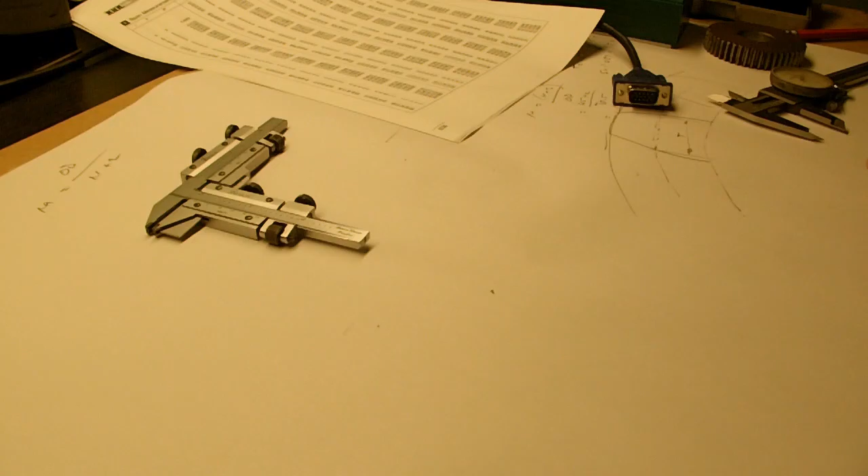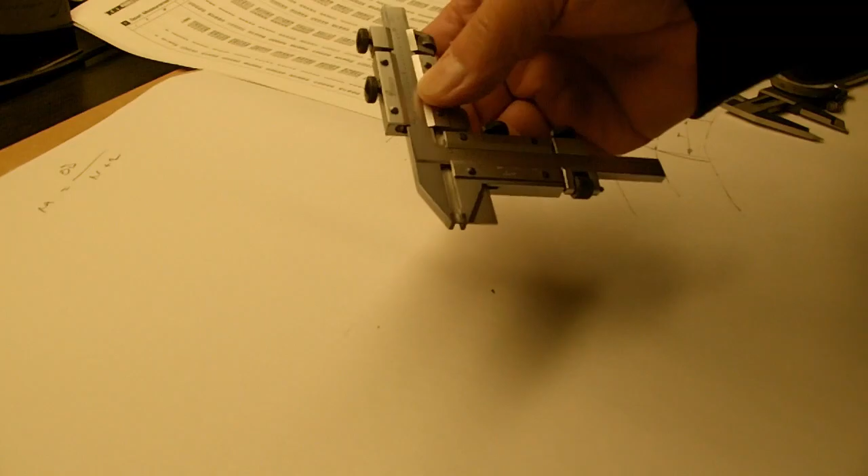Today we're going to look at another way of measuring gears. We had a look at the previous one, this gear tooth vernier caliper, and it does a pretty good job. Oddly enough, you don't actually need one of these. There are ways you can use a regular vernier caliper for measuring gears, and it works quite accurately, but we need to do a little bit of theory first.

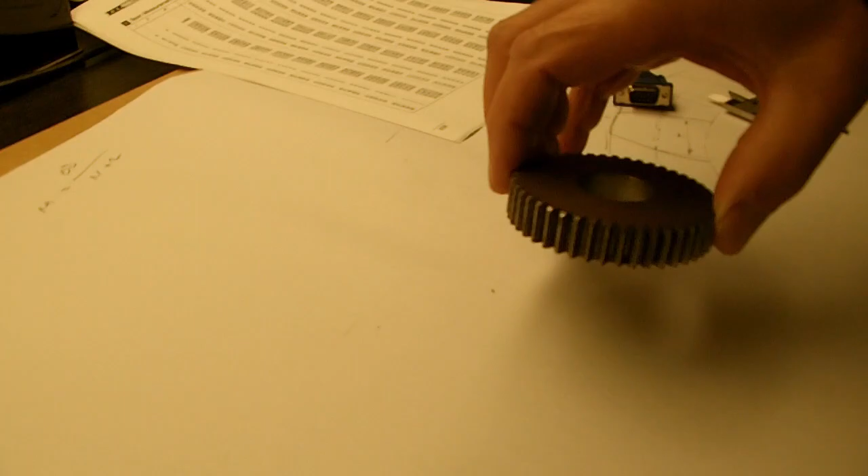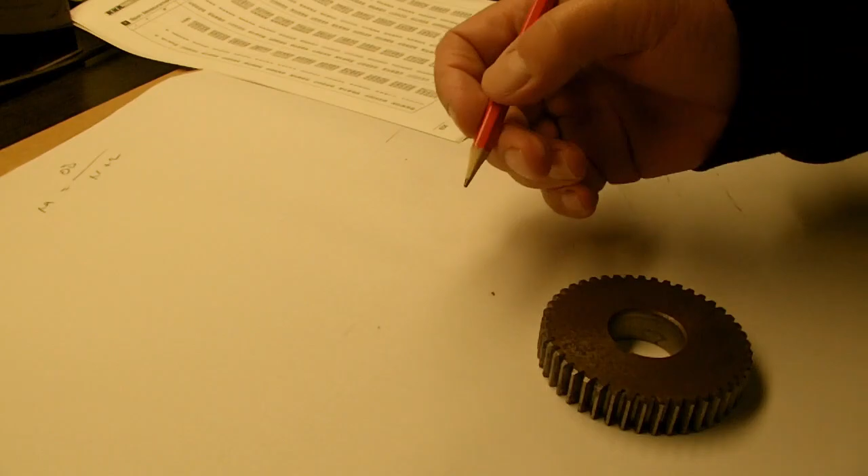With this particular gear here, I have to print a retraction. The previous formula I gave for gears was incorrect. I changed the formula for deciding the module: module equals OD over the number of teeth plus 2. I had it around the wrong way last time, so we're just going to do this again.

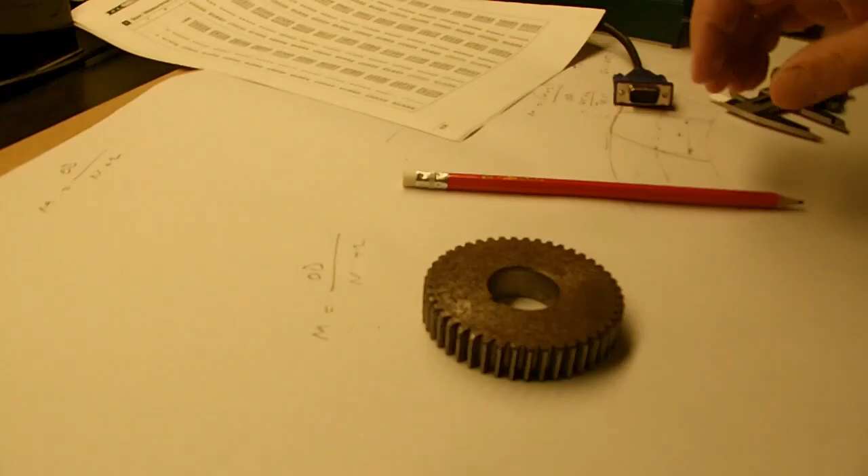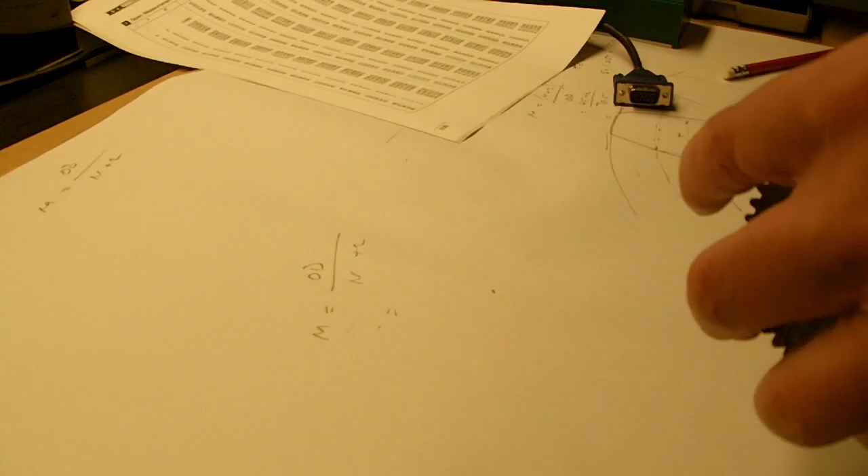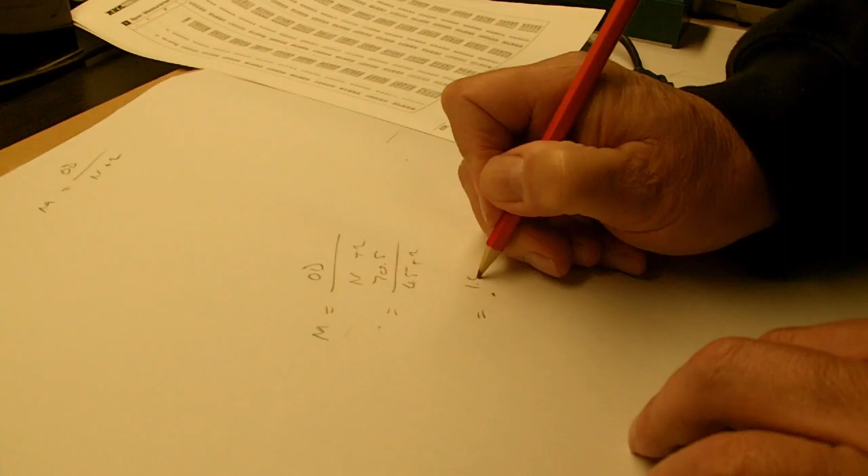With this particular gear, the OD is 70.5. Number of teeth is 45. In this case, plus 2. That all breaks down to an answer of basically 1.5. So that's the breakdown - I just had it around the wrong way last time.

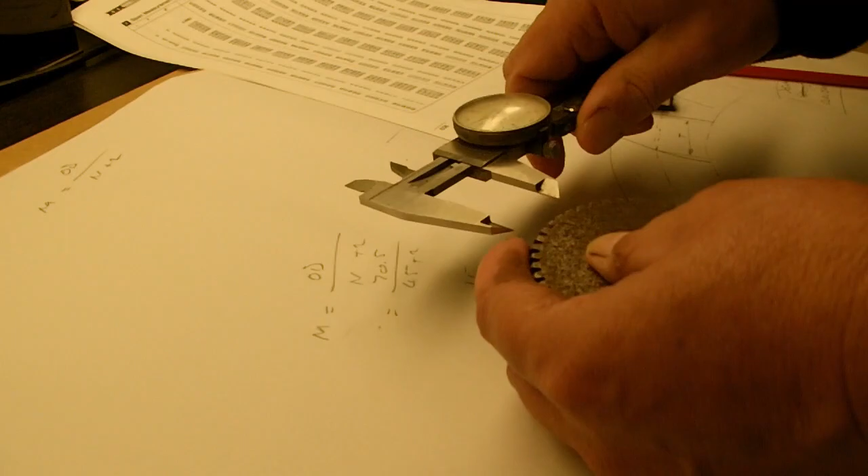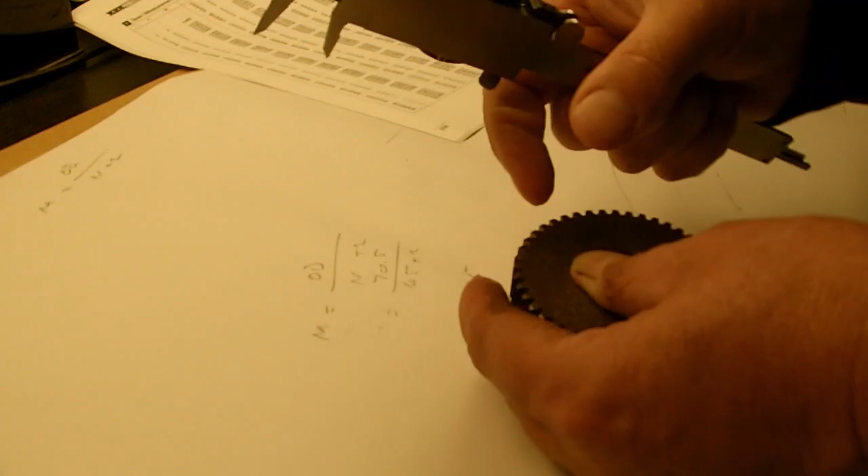Now, when it comes to measuring gears, you can actually use a caliper. At some point on a gear, there will be a point at which you can measure across between a number of teeth and have it lined up with the arc of the tooth. There's a chart that will tell you what the span is. Depending on the size of the gear, if it's very small, down to 12 tooth, it'll be over a couple of teeth, and the bigger they are, the wider the arc. But you need to work out how many teeth the span is over before you can take a measurement.

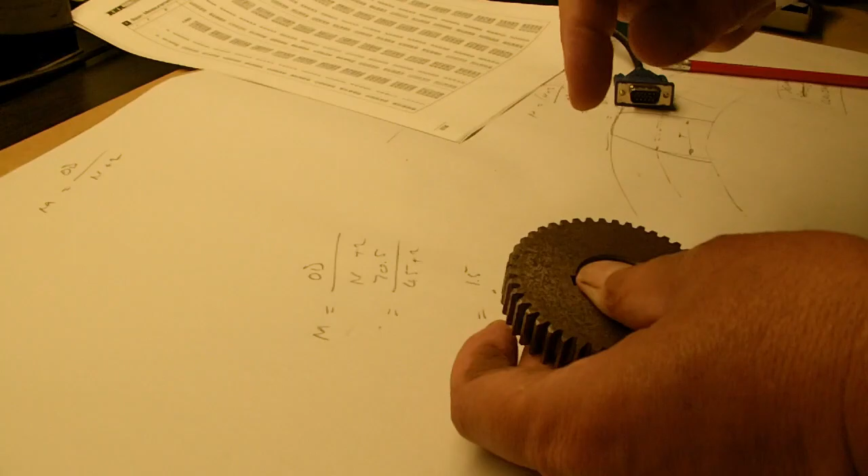I'll point out this is for spur gears. It's a little bit different for helical gears - there's a couple of changes happening there for the calculation of the OD and things like that. I'll probably deal with that in another video. But this is basically for straight cut or spur gears.

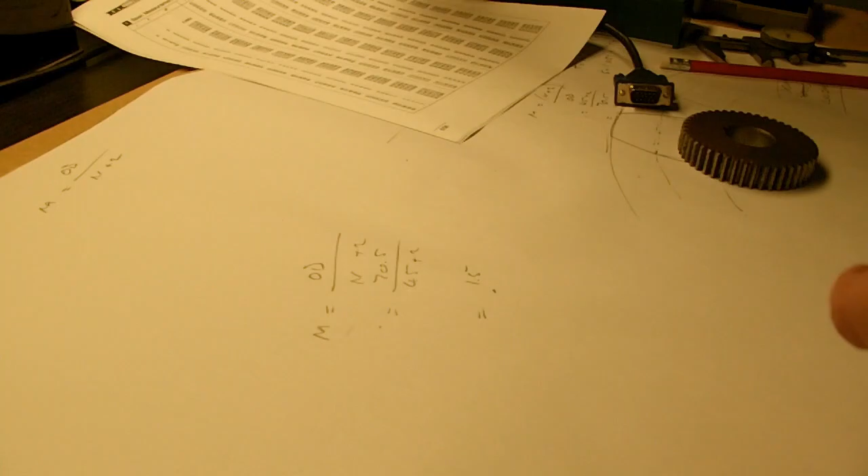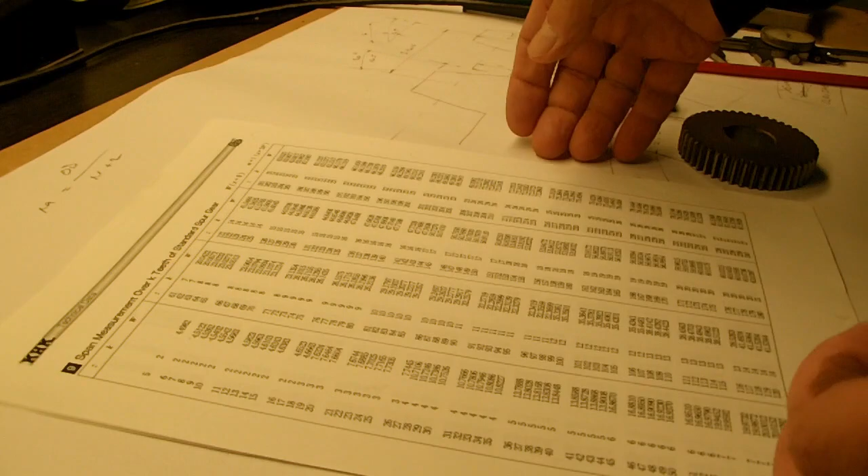KHK do a thing on gears - I picked this up, an excerpt from a book I picked up at a trade exhibition. They do stock gears, and they have a lovely book with all the information you ever want to know about gears. Their website actually gives you this as well. I don't know if you can download it, but it's the KHK technical data book that I picked up at a trade show.

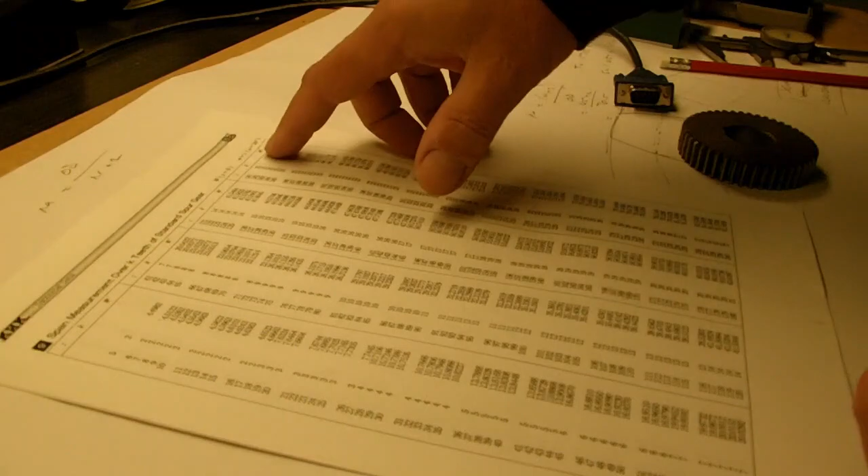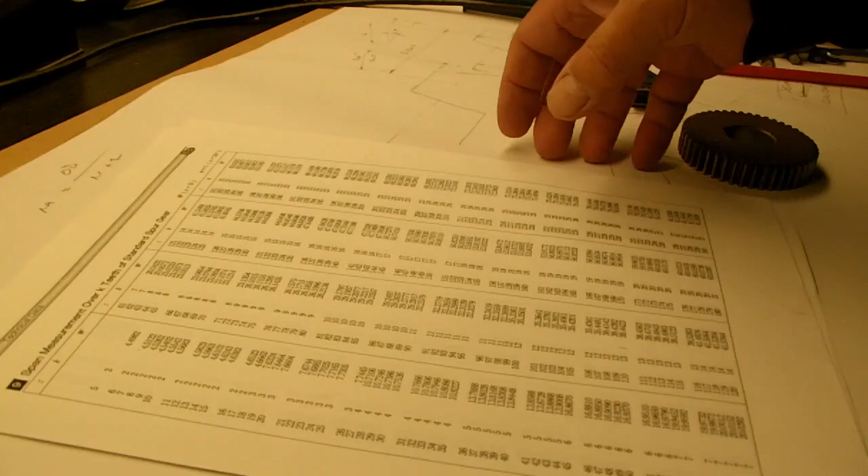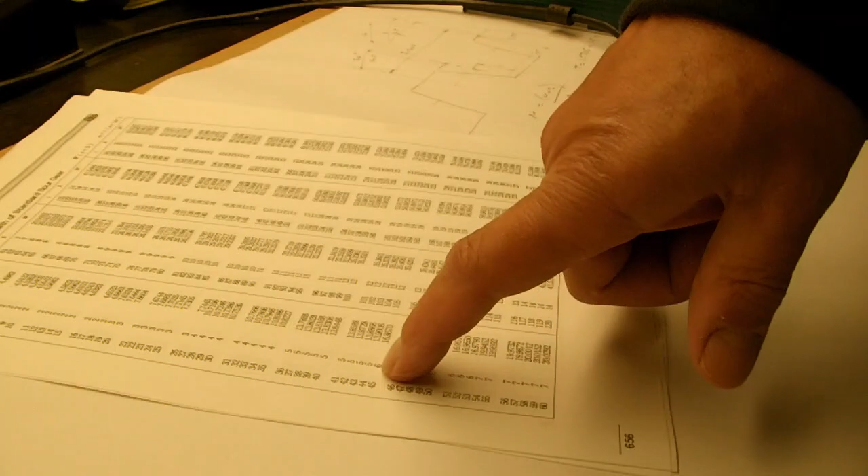This particular chart - there are two charts. One for a 20-degree pressure angle, and another for a 14.5-degree pressure angle, which is over the page. We've worked out our metric module here as 1.5, and on our chart we look at the number of teeth, which is 45. We also look at the span you measure over, and that's 6 teeth - 6 teeth inside the caliper.

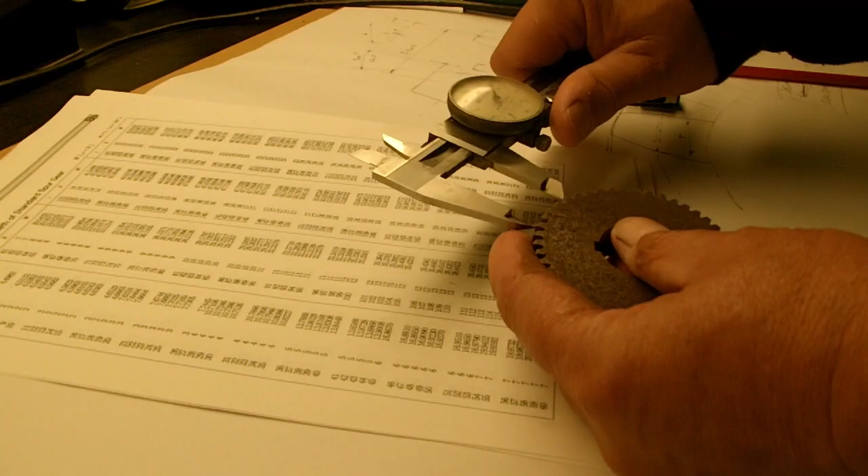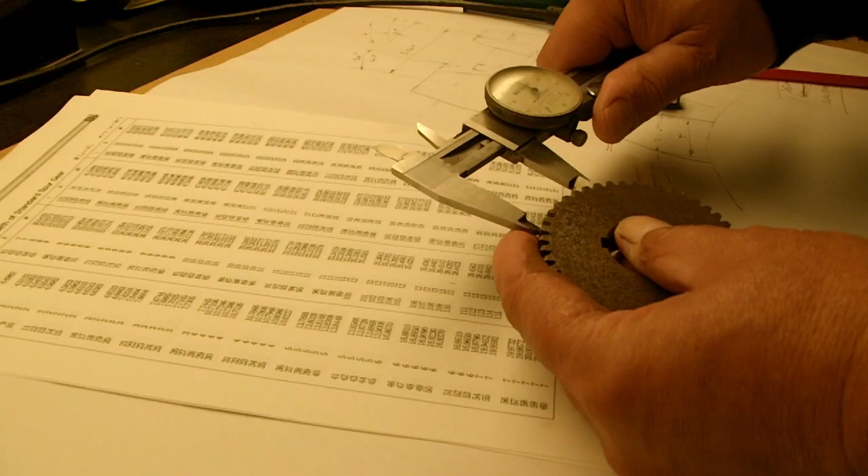If you're worried about whether it's 14.5 or 20 degrees, the simple check is to have a go. If it's actually 14.5 but you try 20, and you open it up between 6 teeth, it won't line up - you won't see the arc of the tooth coming around to something you can measure. It'll be at the tips of the vernier or at the base, not measuring across the arc you want. So give it a go and you'll find out whether it's 14.5 or 20. These charts only work for 20 degree and 14.5.

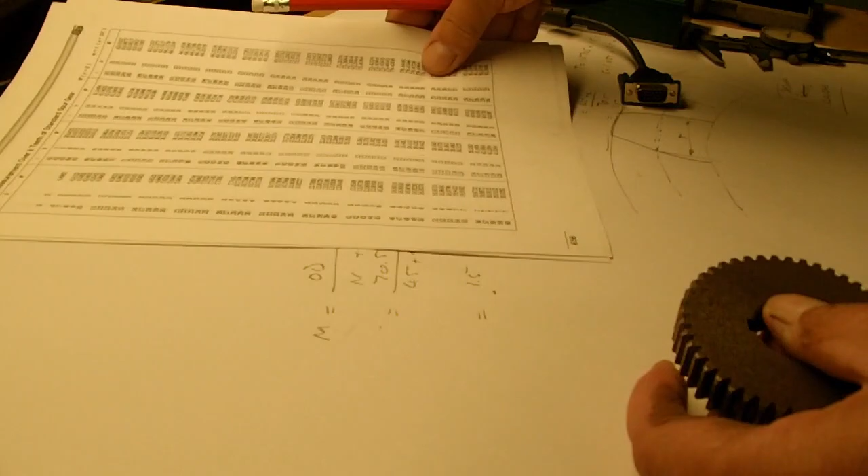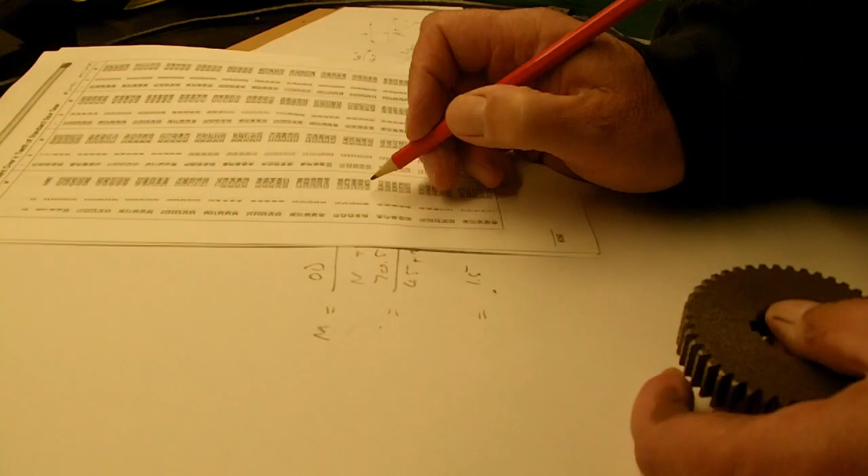Now, on the calculation here, it says for 45 teeth with 6 teeth between the calipers, we have a figure of 16.8670, multiplied by the module, which is 1.5.

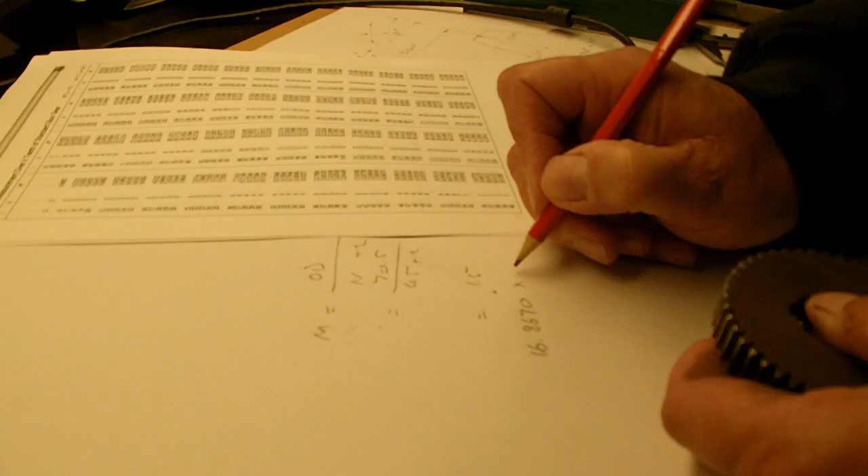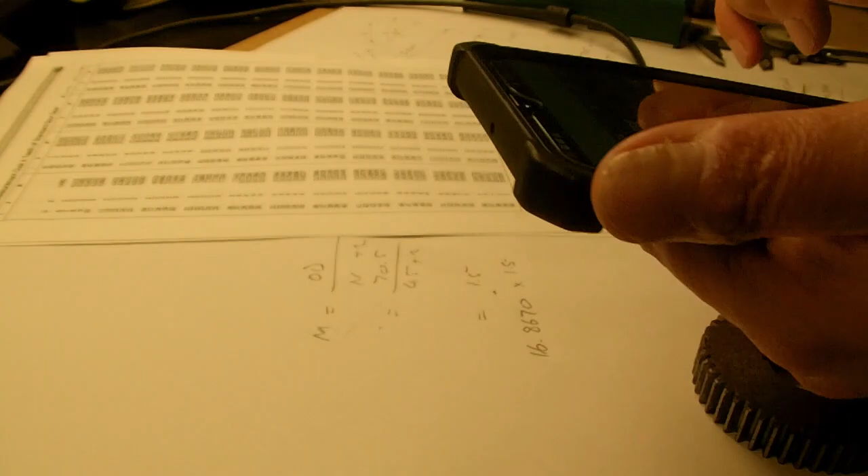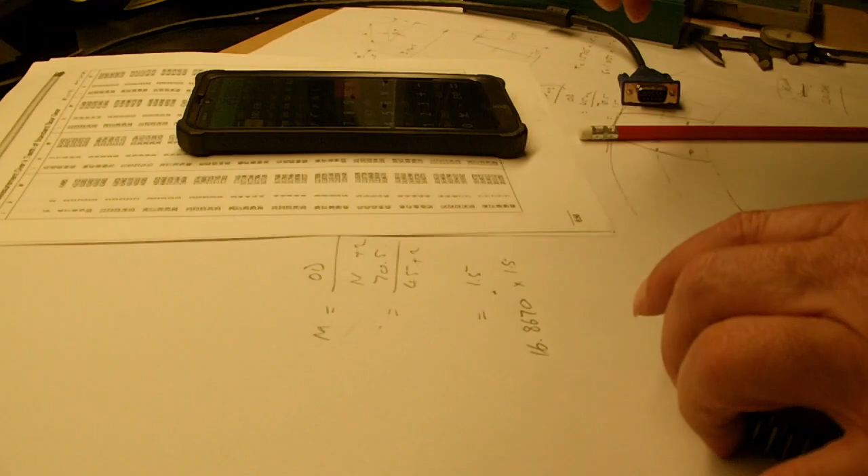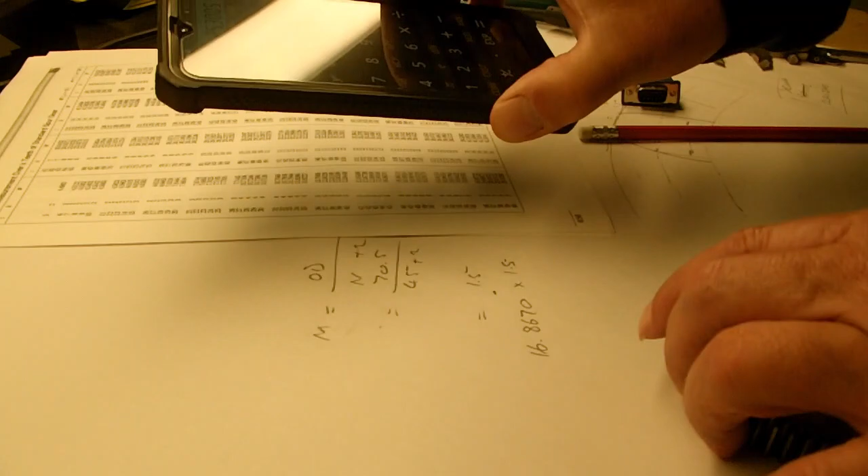I'll grab a calculator here. So we have 16.867 by 1.5 - this is a 20-degree pressure angle because I just checked it before. That equals... I get 25.3 millimeters across the span of 6 teeth, and of course I have to subtract about 6 thou from that, which rounds up to 0.2. So I should be looking at 25.1 millimeters over 6 teeth.

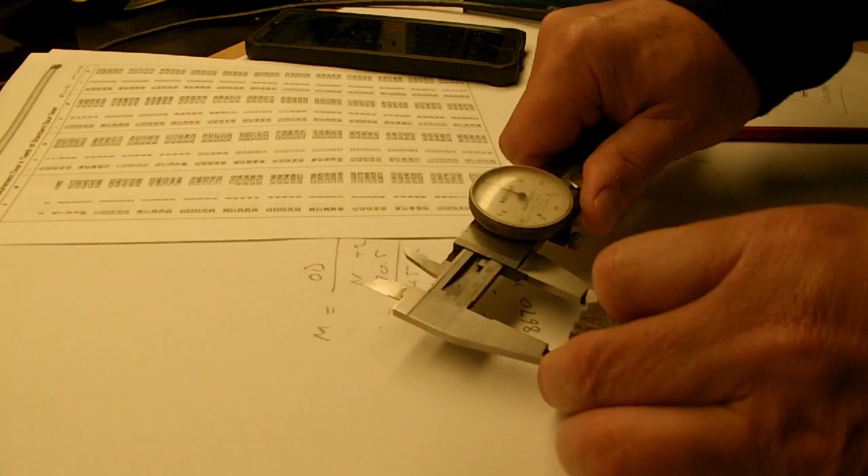So if I just open this to 25.1-ish, that should span 6 teeth. 1, 2, 3, 4, 5, 6. That's correct. And I can take a measurement there, and I get 25.1. So that measures up with this here.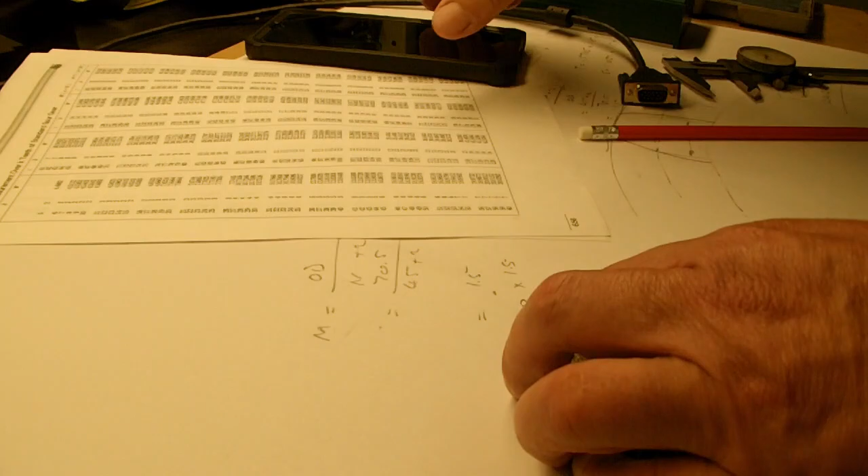So actually, theoretically, you don't need one of these gear tooth verniers at all to measure a gear. Just a regular vernier caliper will do it, or a dial one, a digital one, whatever you like. The chart from KHK will give you that, and you don't need a gear tooth vernier.